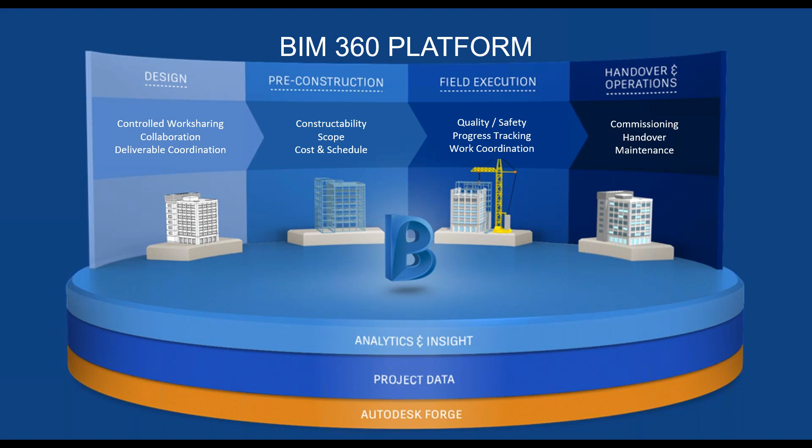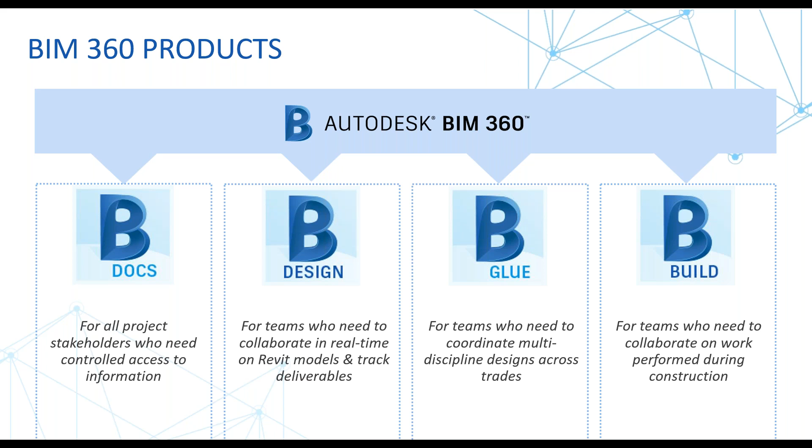The platform overall is broken up into 4 packages that you can purchase today. Those packages include document management, design collaboration, glue for model coordination, and build. Build is what we're going to focus on today.

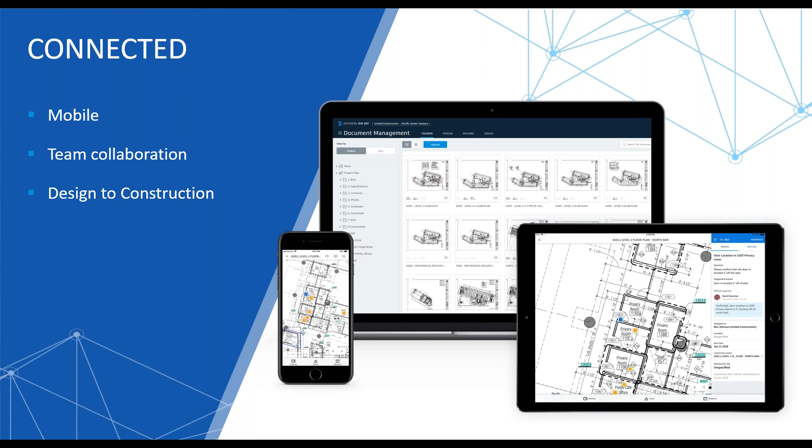And so within build, you get the field management and project management modules. You also have access to the classic product BIM 360 field, while also maintaining the full data repository with document management, dashboard and analytics with Project Home and Insight, and full administrative processes that allows you to manage your projects easily and quickly. But beyond what you're getting with just the purchase of Build, this is a mobile-first connected platform. It connects and allows for greater collaborations between teams, and that collaboration extends not only from design, but throughout the construction process and eventually to handover.

This platform is secure. We have SOC 2 compliance, which is one of the more stringent compliances out there, but also at Autodesk, security is our top priority. The safety and security of your data means everything to us.

Without that kind of strict security protocol, the availability of your data outside of your intended uses becomes critical. We control that through all the permission uses that we have on the user basis, so everyone that accesses the system is tracked and you're aware of all the activity involved with it.

It's data driven. So what does that mean for you? Having this integrated platform that extracts and leverages the different pieces of information allows you then to do predictive analysis. So when you're working on a project and you see that a subcontractor or even a specific team of yours is having troubles engaging that process, we can start seeing what's going on.

Why are they at risk? Is it a quality issue? Is it schedule dates? We can start using that information and then start analyzing every project, and now you can have improved decision making from all the levels all the way to the very top to the project manager on every single job.

And this integrated system utilizing Forge allows us to store over 50 different file format types within our system. It is an open API, so we have integration partners galore. We have over 60 right now, and that number is growing all the time.

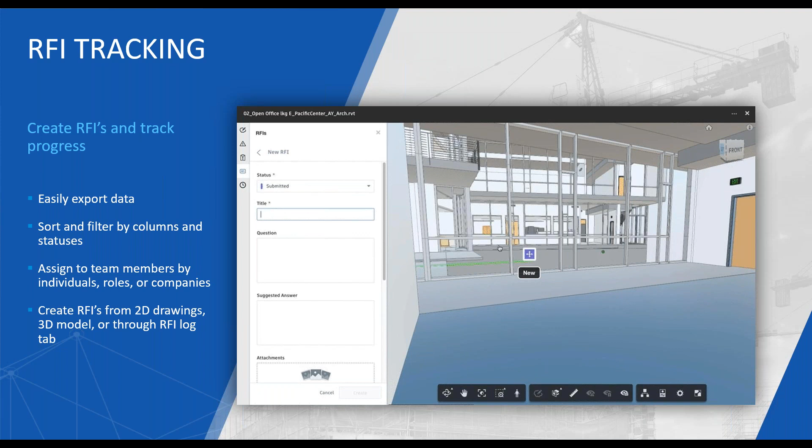Next, we have issue management. During field execution, issue management becomes an enormous need. Not only is it a need for properly executing the work, but it also becomes a need for you to understand what work and effort is going on in your job.

This is really exemplified by the need for root causes. Having root causes within our issues allows us to address the issue at hand, and start learning and passing on lessons learned to new jobs. If you have a similar root cause occurring across similar companies, maybe it's time to have an educational session with that subcontractor or team, to make sure the issues are being corrected today, and not happening in the future.

So those issues are often generated from a quality control or safety checklist. Within quality control, we have the ability to import any checklist you currently have via Excel, and if you currently have classic BIM 360 Field, we can import those checklists as well, making it easy to create these and understand the process of commissioning quality, safety, including punch. All this information can be tracked to understand the completion status of every checklist, and I'll show you that feature as well. But more importantly, the non-conformance issues that occur within the checklist then become something you can monitor and resolve inside the issue management system as well.

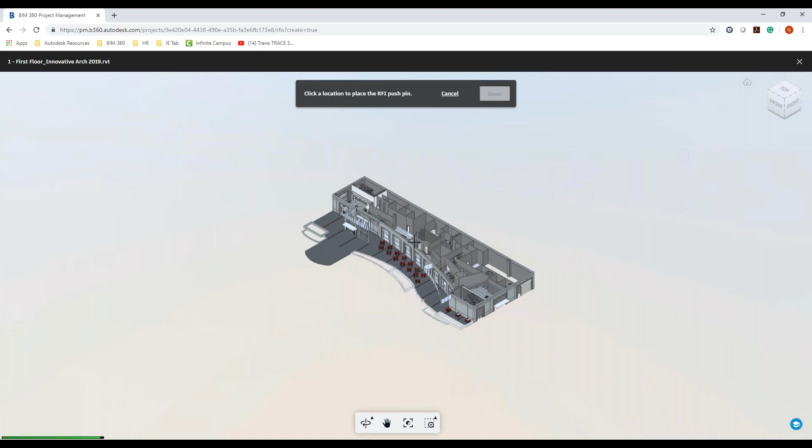So I don't need to be on the sheet. I don't have to find the magical sheet associated with it. I don't have to do any of that. If I want to go into a model, I can go into a model and specifically dive in and apply my pin there. So that door changed. And before I hit done, just notice that the pin floats with the model. So no matter where it's created, I can still track that in other pieces.

So once that's done, it takes me right back to the RFI. It lets you know that I have linked that to a model of the first floor, and now I can start assigning this. So notice this list of assignees are just the people that are manager level. So I will assign this to Alyssa.

I can specify a location, my location breakdown structure if I need to, but since I did pin it, it's going to go to wherever that pin is. And then I can associate my due date of next week. Add a co-reviewer. Antonio will be my co-reviewer today.

And then if I have a distribution list, I can then associate members there. So if I want to start adding other pieces of the design team, I can add that here as well, or the owner, or whoever it needs to be, I can start associating all the designers inside of it. Now, once I hit create, you'll notice here at the top right that it's going to have created the RFI. With that creation, an email is being sent out to all the people involved in the process so we can start understanding what's going on.

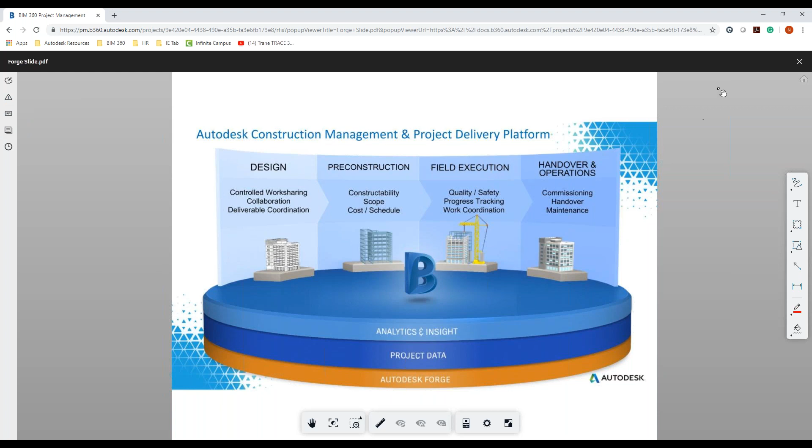And again, the full activity log is always there. This report can be filtered, just like what we were looking at before with issues. So we can see all the different submitted items. Your report can be exported as a PDF and a CSV file as well.

But before we go on to submittals, a couple of things. First of which, back in my project settings, underneath overview, you'll see here that it will show you the entire activity log that has been occurring within this project. So under document management, let's see.

Here's all the activities. Notice that viewing documents, submitted RFIs, all the things I've been doing so far are being tracked, keeping the full activity log. I can also export this out. So if heaven forbid something goes terribly wrong and someone deletes a folder they shouldn't have, you can see where that happened in the timeframe, and then restore it back from the exact time it went away. We can also see if certain things happen that shouldn't be happening from a certain individual, track that down, and make sure permissions are adjusted or whatever needs to happen moving forward is done.

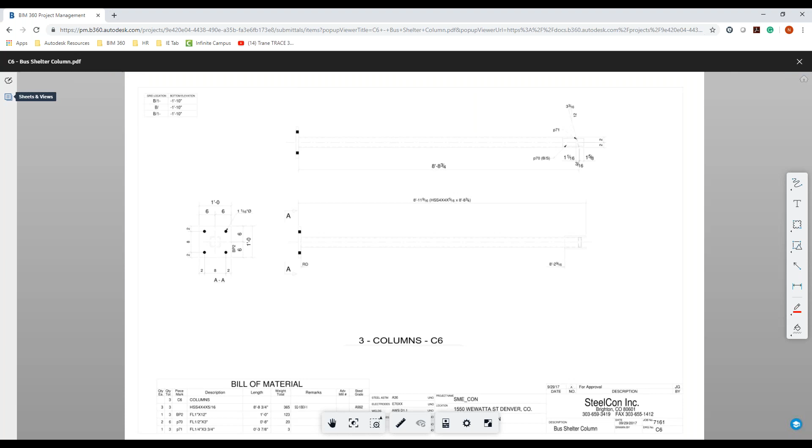Now, what becomes important is that if a subcontractor uploads a model for review, and there are any sheets associated with that model, you can toggle back and forth between them. Again, having full flexibility to work the way you need to work most efficiently, with that full activity log.

Now, as we're creating an item, going through the steps, it looks really similar to that RFI creation process, and that's on purpose. We did lots of studies with clients and different experts on interfaces, and the more unified it is, the easier it is for people to pick it up. Whether it's someone in the office or in the field, if the interface is as unified and easy to learn as possible, everyone starts using the product even better.

So we have those predefined spec sections. If I need to create a new one, I can do so. We'll take a look at, let's say, this cable tray section - is there a subsection associated with it? Sure.

Cable tray spec description, or documentation. I can add any additional information, choose the type. This is more documentation. I can assign it to my submittal manager, and then I can browse to select.

So within here, I will just browse to my OneDrive location. Again, I can work across all the different platforms of whoever I need to work with. And here is my cable tray. So I have uploaded that document. I can create another one if I want to.